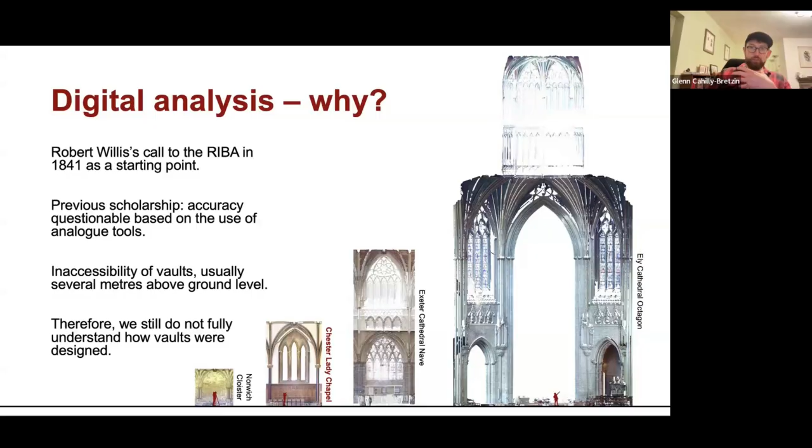So the Centring the Past project went about digitizing as many of these vaults as we can, and each year they still try to scan and capture an additional church, cathedral, or abbey somewhere that has high vaults. In particular, they're looking at ribbed vaults.

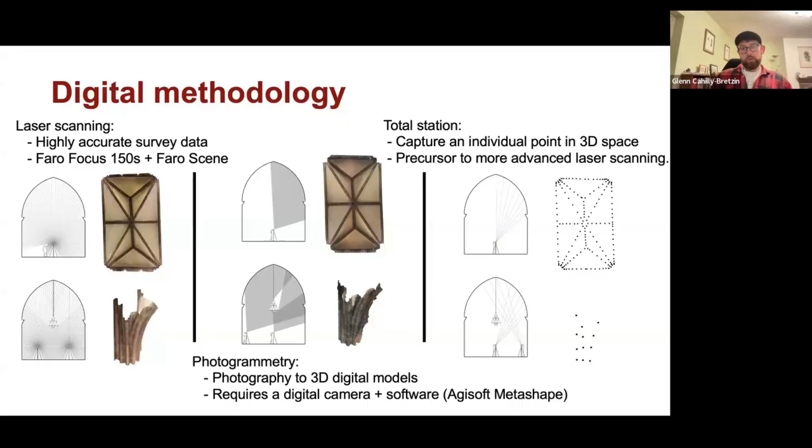The Centring the Past project analyzed the digital surveying using a few different methods, and found that combining these three methods, which each have their strengths and downsides, lets you create highly accurate digital 3D models of a structure. By scanning the same structure several times using laser scanning or photogrammetry, we put those into a program like Rhinoceros and come up with 3D models like what we have on screen now.

Which, when you stick them all together, gives you a 3D model of a whole cathedral or building. With this 3D model, we can start to reverse engineer or unpick the design process that the original builders approached, as well as analyze in more detail some of the design features or construction decisions that were made, things not visible to the naked eye when stood on the ground, but when looking at very close measurements, you can pull it out.

We tend to start first by pulling out what we can identify from the plan view, the bird's eye view down from the vault, as shown on the right side. Then from there, we'll analyze the elevation view.

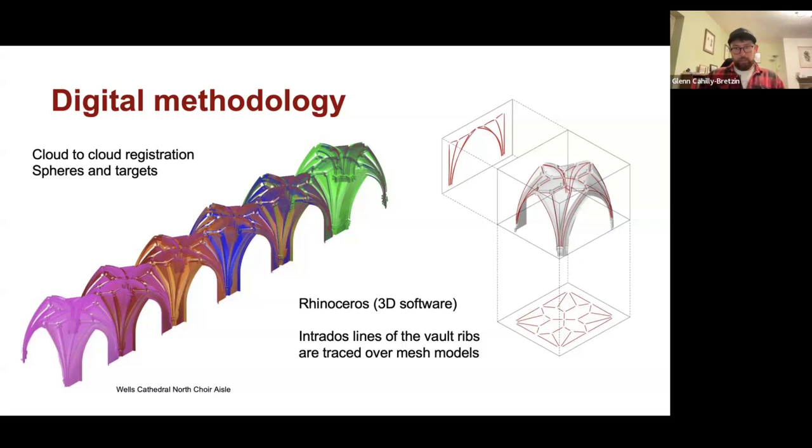For vaults, the main thing, or the first port of call we really want to identify with the ribs, is how the arches were identified, how the curvatures of the arches were set, and what method was used to get the geometry of that arch.

The reason we try to start with that is because we feel this is also the starting point for the medieval craftspeople, both the stonemason, the master mason, and the master carpenter, who would have been collaborating on these structures.

Depending upon what the known elements were for those builders or for the particular site, there are different ways, just using a straight edge and a divider or compass, just medieval geometry, that we can very accurately get back to the curvature and the radius of each of those vaults or curves.

So on the right hand side, this is one of the curves from the Chester Cathedral chapter house vestibule, which we will come back to in a second.

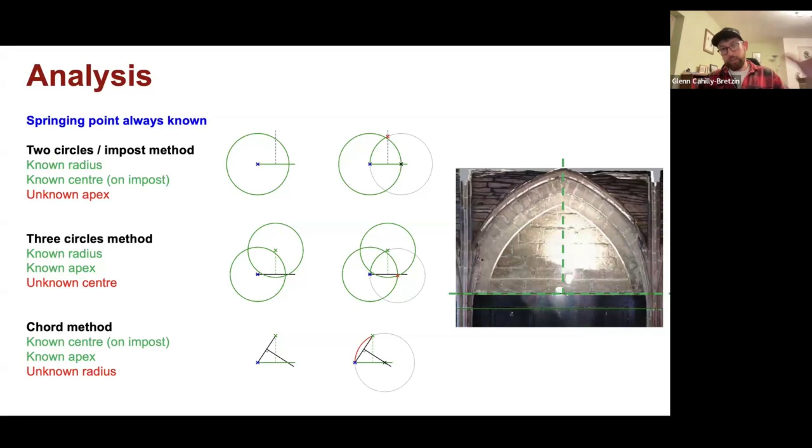This is all me just lining up the digital processes we're using when we start to try and analyze things based upon the fabric that exists as it is. In this way, we're trying to essentially get back to a digital tracing floor, trying to analyze the structures as if we were in the shoes of the medieval architect in some capacity.

So again, we're starting with a plan view, and from the plan view we can say, okay, we know the springing point and we know the apex. Now we just need to figure out what the missing element in that equation will be, the radius, or we can go elsewhere.

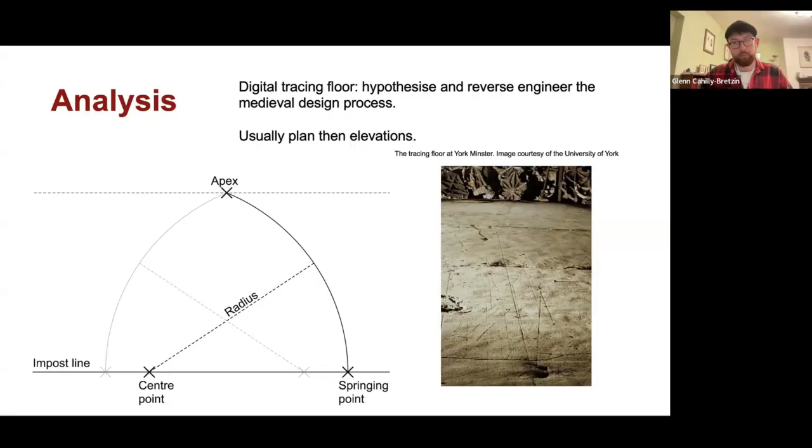And that sort of mimics what we see in existing tracing floors. But bringing us back to that initial quote, this is another passage concerning centering from the medieval period.

We understand that doing all this digital analysis is really just one piece of a very large puzzle, and only one perspective. In order to actually understand the structure, we really need to look at it from a bunch of different perspectives and different disciplines or trades. This quote captures it, or reflects it succinctly.

This is from the 15th century charter of Hereford Cathedral, and it's basically a builder's receipt or invoice, as it were, or contract.

It said: furthermore, the same Thomas, who was a stonemason, shall make or cause to be made the whole vault of the cloister, and shall find sufficient stones for the same work, and he shall have for the said stones as much timber in the Lord's woodland for the lower roof, i.e. the centering, as the carpenter of the said church, that is Hereford, estimates in plans ought to pertain to it.

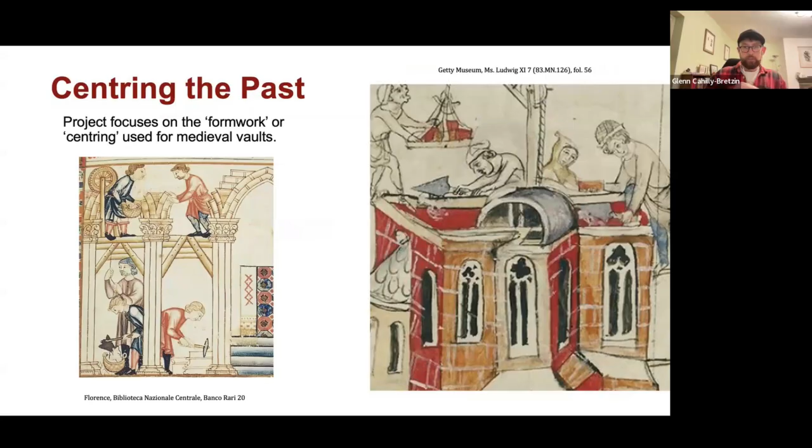The first of those is pictorial. We have here in the lower right-hand corner, in between these pre-modern depictions of the master architect, a centering that's holding up a barrel vault, it appears, or some sort of archway. We have several other images from the medieval or pre-modern period of either scaffolding or the construction of vaults that shows timber formwork of various kinds.

The problem we might consider with these as evidence, or the caveat we might keep as we're looking at them, is that the person executing the illustration or drawing may or may not actually understand what they were looking at or trying to depict. This is somebody who may have experience with centering and is capturing accurate details of how it functioned, or they may have only glanced by it and are just trying to remember what they had in their memory.

This is particularly important when we're trying to think about what shape or type of frame centering took, how it was being supported. And of course there's the issue of pre-modern art often being highly stylized and not necessarily focusing on dimensional realism.

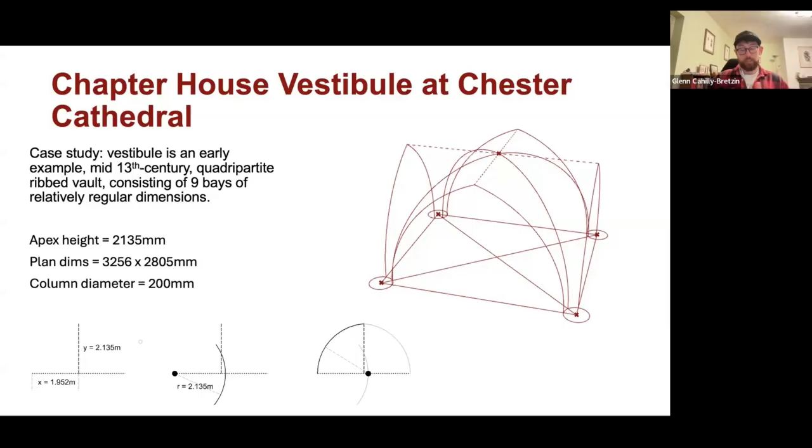With these vaults, we took the scanned data and developed an idea of what the inside measurement of the stones would have to be, thinking that the architect, whomever had precedence at that time, would have said, this is the inner arc that I want to achieve. Then the master carpenter and master mason would have said, these are the lines we're going to work from. Both the stones work upwards from those lines and points, and from the timber carpentry point of view, we need to support that curvature, building up to that line from below.

So then for us as a team in January, having that data in hand, I approached Adam and Pete. Adam already covered a bit of that conversation, but to reiterate, through our conversations the whole team agreed that the main thing we need with the centering is that it's rigid and strong enough to hold the stones together and hold them up during construction without deflection. The frame has to hold its shape without distorting.

This is especially important because with the vaults or ribs that head into the middle of the vestibule and are not bounded by a wall, any deflection in the timber work would presumably push that pier out of alignment and out of place, causing problems to the rest of that space and the other vaults that would be constructed. So the centering needs to be rigid and strong.

We'd also like to experiment with centering or formwork that can be struck and reused multiple times. It has to be able to be dismantled within a close space under the completed vault without impacting it. Part of the reason the Lärbro vaults in Sweden are still there is that the only way to dismantle that formwork would be to cut the poles in some capacity and take them down in pieces. There would be no way to reuse that centering after dismantling it, and that just wasn't what that particular bit of formwork was designed for.

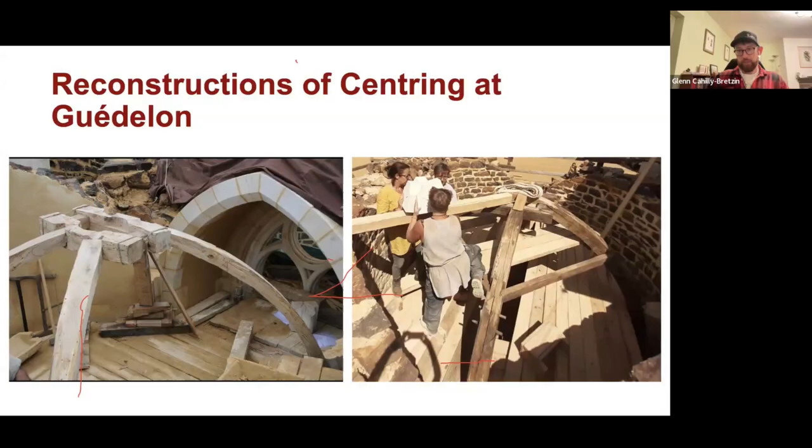The other thing we wanted to experiment with: most of the pre-modern images of centerings involve some sort of central post, presumably to support the boss stone. On the right-hand side, that stone resting right at the apex seems to have been set first, and then the voussoirs, or rib stones, set up afterward. We can talk about that later in questions if people are curious why.

In order to support that, Guédelon created this sort of frame yoke shape. We wanted to try a slightly different design to experiment—since a lot of the medieval images seem to show some sort of center post closer to what they did on the centers on the left-hand side of the screen. We wondered what design approach, or how that would change what we did.

We initially mocked up a design in a small 1-to-12 scale model, and then I brought it to Pete and Adam and said, okay, this is the first attempt and first thought, but it's coming from my experience—I have some experience as a cabinet maker and a little as a timber framer, but I am not a master, or wouldn't even necessarily call myself a timber framer. So I said, this is one idea, but I don't think it works.

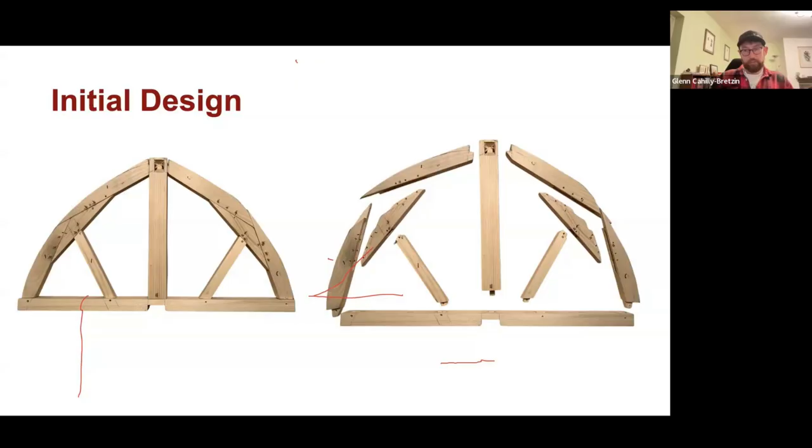Pete and Adam gave their thoughts and feedback, and we came to a revised design, shown here on the right-hand side. I reworked the design into another 1-to-12 scale model, which we could then play around with in a 3D print of the vaults. Using the scanned data, we were able to 3D print the vault in miniature, and then play with it using this model to see if it could do what we needed—at least in terms of being able to strike the centering within a very confined space.

It seemed to achieve a couple different aims for us. Compared to the first model, the second design had much simpler joinery for the central post and braces. It used shorter timbers, so it would presumably be lighter and less resource intensive. It could also be compartmentalized more, with fewer parts needing to move together, so once it was lowered and distance created between the timber work and the stonework, the frame could be dismantled asymmetrically rather than all at once. We could take out one spandrel at a time, which was a benefit in terms of labor required.

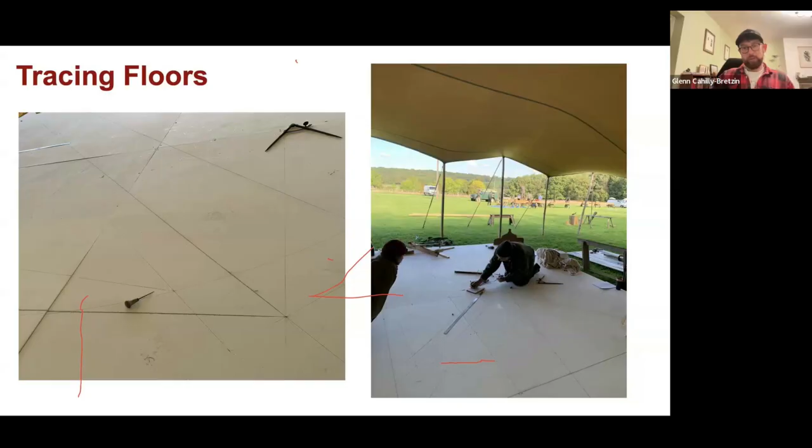The only measurements we took were from the existing stones, and we were able to create our own rule or rod for the build based on those measurements. Once we had that, we were able to use it for scribing and putting the timbers together.

These are images of us floating the hewn timbers over the tracing floor design in full plan, so we could scribe or transfer the necessary joints and layout onto the beams themselves. For this, we were using the medieval methods as much as possible.

Everything was done using plumb bobs and string. On the left you can see the levels we used throughout were plumb levels, not bubble levels - just a planed straight wooden surface with a weighted line.

Each of the joints themselves were all hand cut, having been marked out using shoulder plumb scribing. You can see everyone lining up their joints and lofting the frame together.

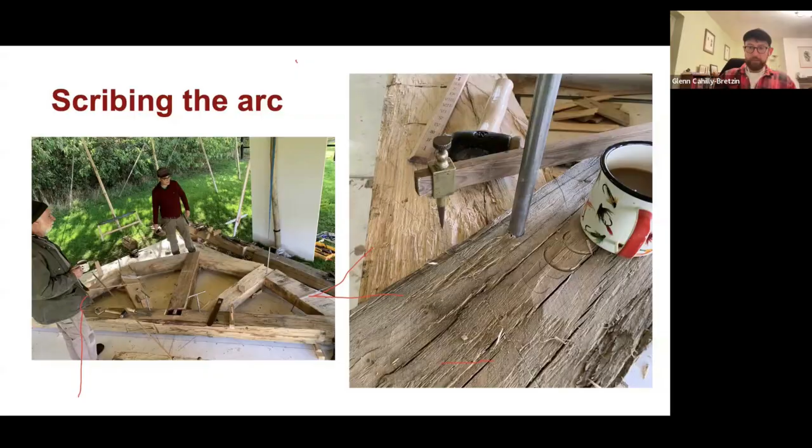And so now with the frame built, we have an initial list of research questions which we'll start investigating, as to how that framework or formwork was used and what it can tell us.

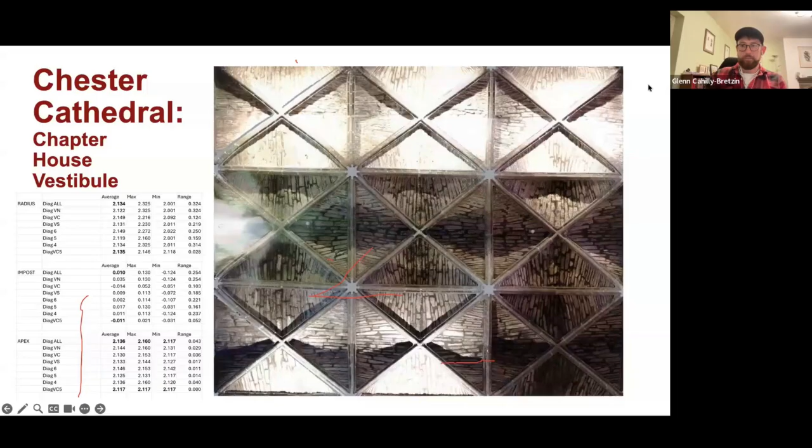Okay, thank you very much. Right, and next we will go to Andy Tuckwell. Stop share for right now.

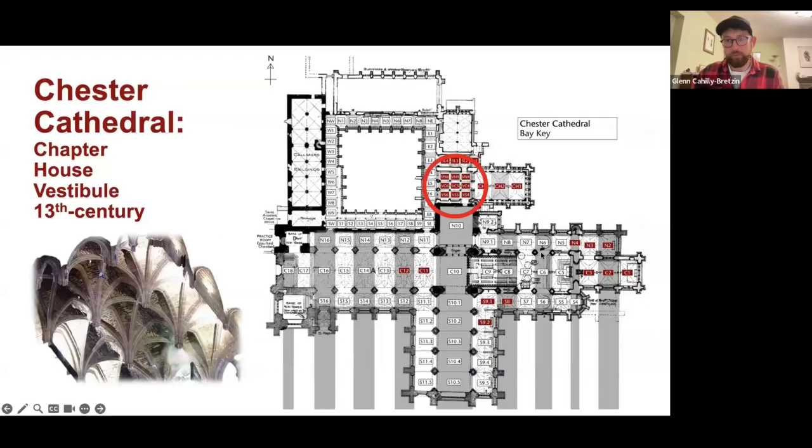So if I return to Zoom, share this, play from current slide. So if people can see this - I can zoom in on that myself. Oh, is this zooming in on it at all? Or is that just me?

So these are the nine vaults right there. On the north and south, they're bounded by some heavy walls - one is the wall that separates the slype from the dormitory, I believe, and then the other is the north transept for the cathedral.

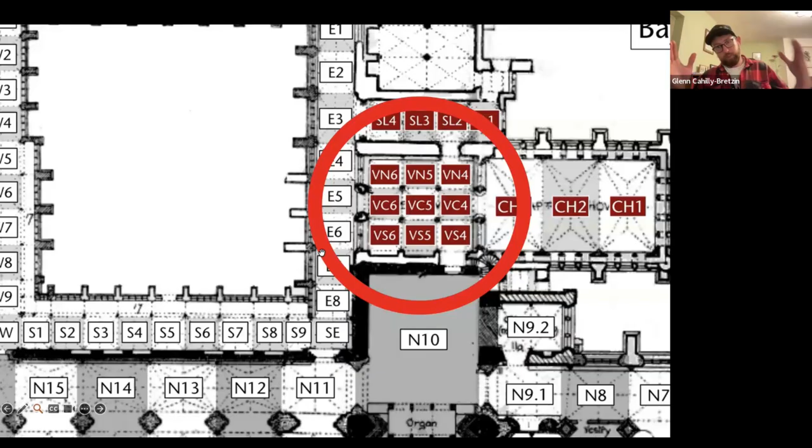On the west side there are another set of vaults with the cloister, which will help buttress the thrust there, and then those cloisters themselves are buttressed on the outside, as you can sort of see with the footing.

And then on the east side is the chapter house. So those walls are not solid, but they are relatively heavy, in terms of there are windows that go through them - a lot of windows in the chapter house.

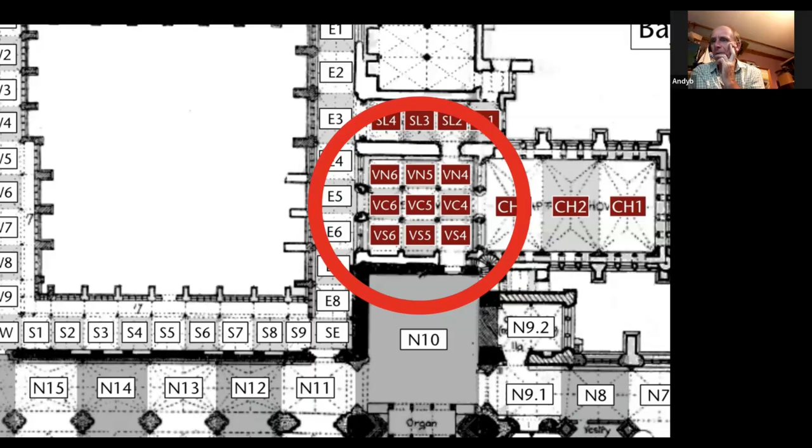Looking at that - and so the chapter house have got the exterior buttresses on all three sides. Yes, near enough.

Now, what sort of height are you looking at the chapter house vaulting to? Sorry, I forgot what this vaulting is - the vestibule? Yeah. So the crown of the pillar, or sorry, the top of the pillar...

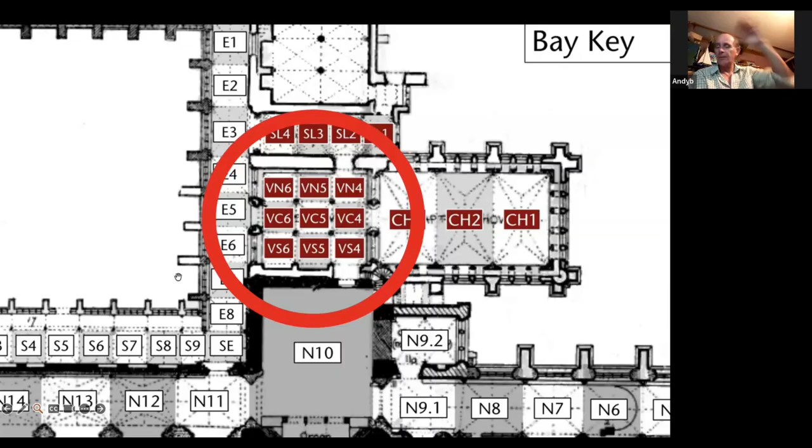...where the arch springs off from, is that a comparable sort of height to the pillars on the other constructions from around its perimeter? Do you get what I'm trying to say? Yes. So, it is.

So I'll float back to here - the chapter house. Off the top of my head, I don't know exactly how much taller, but they are at least twice as high as the vestibule, or two or three times as high. They are much higher.

Is that from the springing point or to the peak of the vault? Both, I think. So the vestibule - I wish I had a photo from the cloister looking out over it.

The vaults that we're looking at, and the ones that are circled here, are about 4 meters from ground level to the apex - the inside apex of the vault, or the intrados.

It was like a ground floor covered passageway, because above it there was a passage - people would walk on top of these vaults, moving from the dormitory, which is the building, the structure above it.

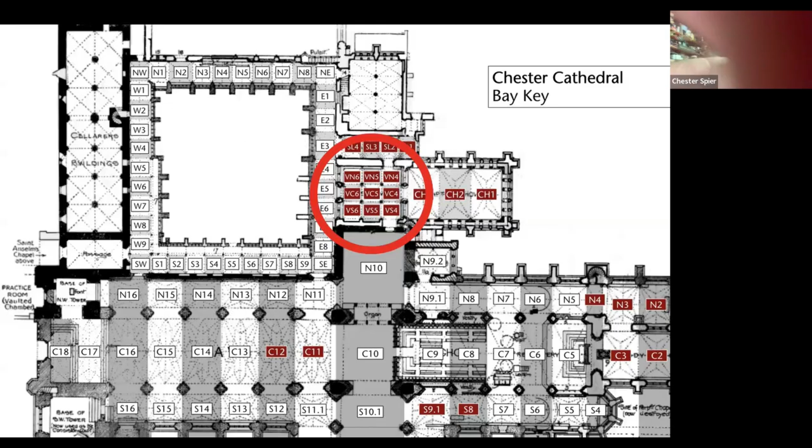The materials for it will hopefully be floating around with Adam and the Carpenters Fellowship after October. I've seen the work - to be honest they did a fantastic job. I saw them on Friday, and then when I saw the post up on Sunday and they'd got it completed, I thought, oh, I weren't expecting that.

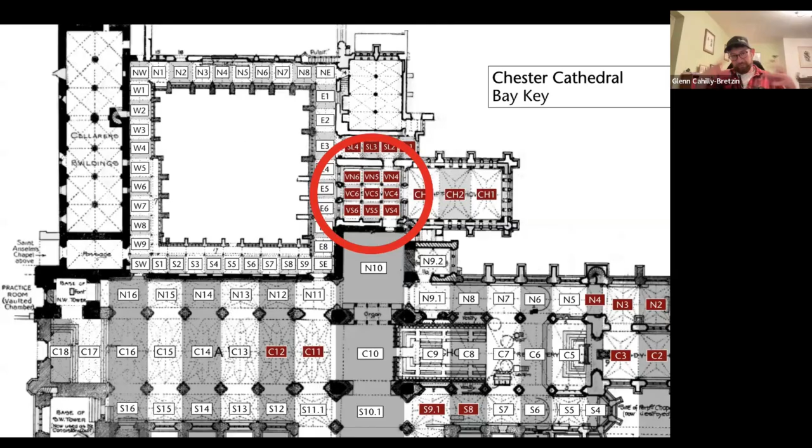Well done, Phil. Thank you, Glenn. No, no, thank you. We'll keep testing - we'll give the nine vaults, the nine bay thing, more tests, and we'll keep everyone abreast of how that goes. Cheers, thank you.

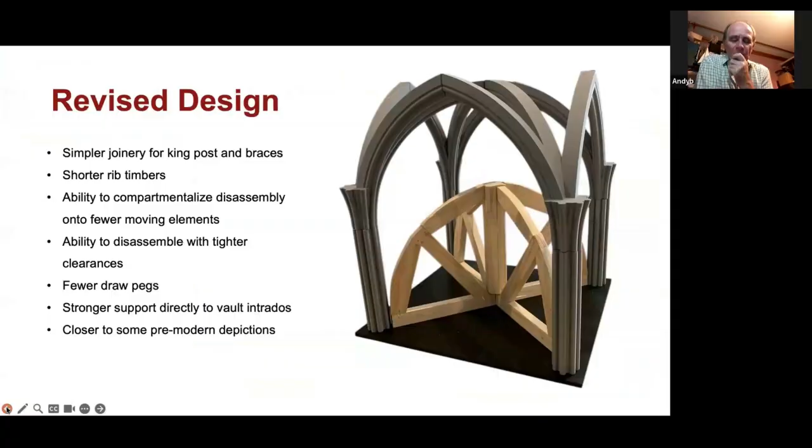But if I go back - to a certain extent, you say there's not many images of centering, but to a large extent it's general house, well, building roof geometry, and it's the same principle, but it's just something that you remove at the end of the day instead of leaving it in. Yes, I was going to have a look through Hewett's book before this, but I didn't get home in time to do that.

Somebody say something else. Hewett, Hewett's - oh yes, I'm sure in there somewhere is almost a template for this sort of construction. Not classed as centering obviously, because it's being used inside a building as a building. But no, I love this, particularly in this form where you've got you're doing it for a vault rather than just an arch like the image there, which is quite simple really.

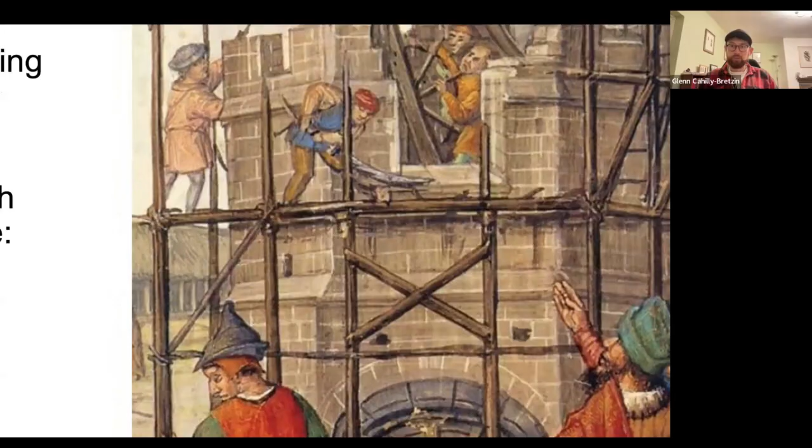So just how long were they leaving the centering? There's that passage of the priest getting impatient and taking it out, and maybe that is too early, but especially with hot quicklime, I don't know whether it would have to be up for terribly long - maybe just 6 weeks or so. I guess it really depends upon maybe the size of the stone.

But if you work on the principle of having nine centers and you're doing all this, that could be left up there till just before finishing day, and the belt and braces approach means everything's set and there's no need to work out oh, dare we take it out yet - as long as you can work around the supports for the centering and carry on working inside, it's absolutely a no-brainer. You just knock up nine, stick them in there, and leave it till just before the finish.

I'm not saying I've got something to add to that, Andy, but once the keystone's in the top - and the lime never really fully sets properly because the lime's breathable - once the keystone's in, I think the arches are all, within a short space of time, self-loading. So the actual center isn't actually needed below it, because once you get the keystone on top, it's actually supporting itself with the mortar around about it.

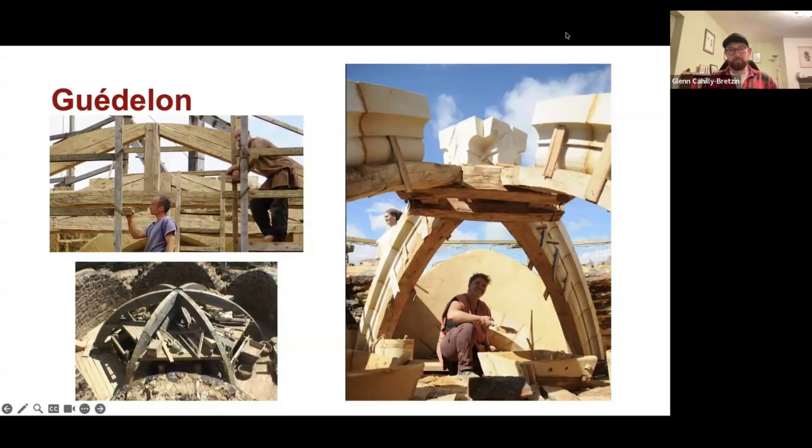That scenario you just mentioned about it being a hump instead of a curve, maybe there was a partial collapse, and the top edge is closed and the bottom edge is open, which would give that effect with a bit of fancy pointing. You'd never know. Yeah, but anyway, there's just a theory for it.

Yeah, no, absolutely. I mean, it's all we have, so your theory is probably just as, if not more, valid.

I think the stones were... it's not the same as a brick mortar bed, like 10 millimeters. I think they were a lot finer than that, a lot finer mortar bed between the stones. I'm not going to say 6 or 8 mil, but it was a lot smaller, not the same as modern houses with a 10 mil brick mortar bed. It'd be a lot finer bed in between each stone, and that's where the lime wouldn't take very much to actually dry out. You're not going to get big wide beds in your mortar, I don't think. I've seen stonemasons actually build stuff, and they have quite fine mortar beds between them when they're building it.

I think a good accompaniment to follow up this program would be to have a stonemason come and answer these questions we're spouting about now. We've got stonemasons at work who actually teach this stuff, I work in a college, and we teach stonemasonry apprentices as well as joinery apprentices. So there's a guy at work I'm going to let watch this from this job after he's done it.